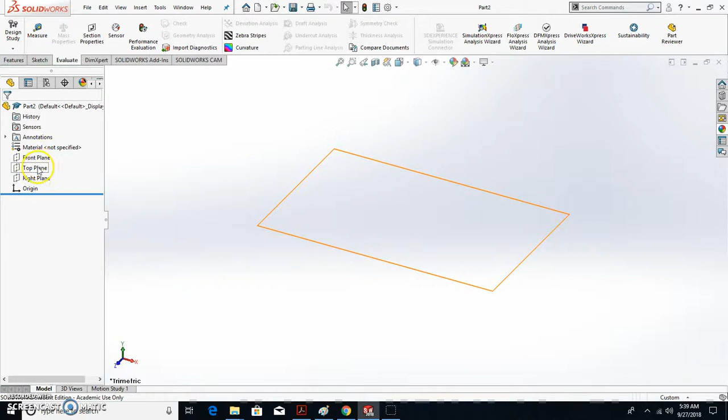Hit OK. To start that sketch, we're going to start from the top plane. So click on the top plane, click Sketch, Sketch. I'm going to start a line segment from the origin.

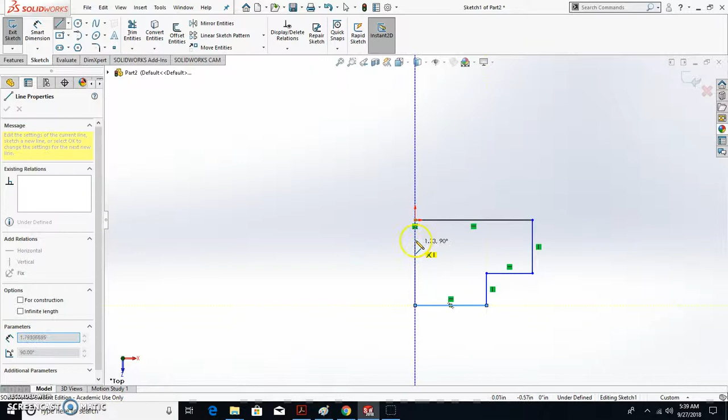Again, initially here, I don't care about the lengths of any of these lines. Let's just get the geometric shape of your dog run set. So let's say one of the requirements is it has to have an inside corner. So then I'm just going to close out the shape, and there's my basic shape of my dog run.

Then I'm going to start my first dimension here. Let's say that this dimension is 3 feet. So 3, then a foot mark, and enter. Now you should double check that this says 3 feet here.

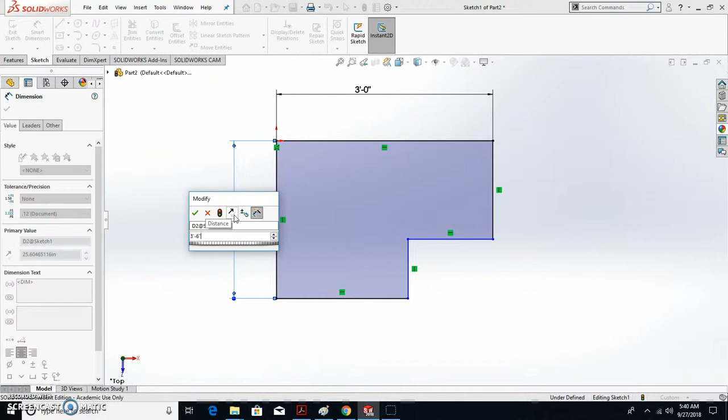Then I'm going to go here. Let's dimension this one. Let's say this is going to be 3 feet dash 6 inches. So again, make sure that you have the feet and inch marks. Accept that.

Notice what's blue yet, because these are under defined. So if I hit escape, I can drag this and drag this.

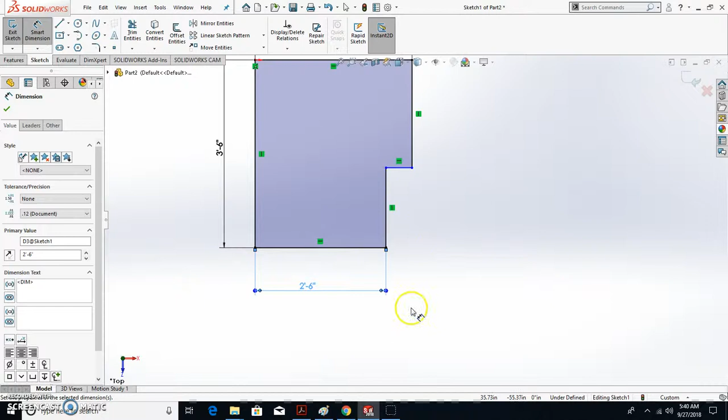Let's do this guy. I'm going to have that one at 2 feet 6 inches. Now as I look at this, that only gives me 6 inches here, that's kind of tight. I don't like that, so I'm going to go with 1 foot 6 here.

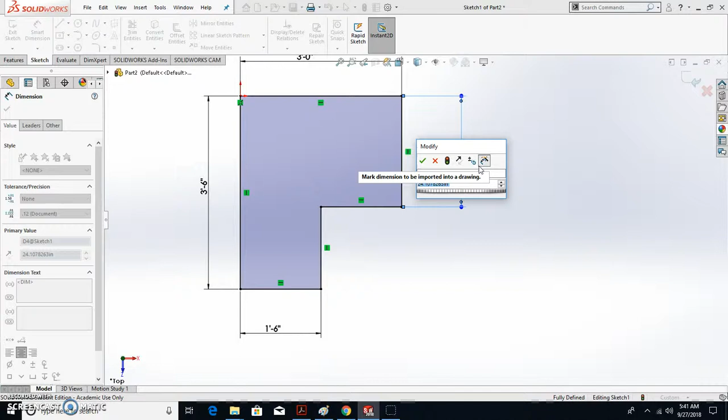And then one last dimension. I've got to do this guy. And let's see, we're going to do that one again at 1 foot 6 inches.

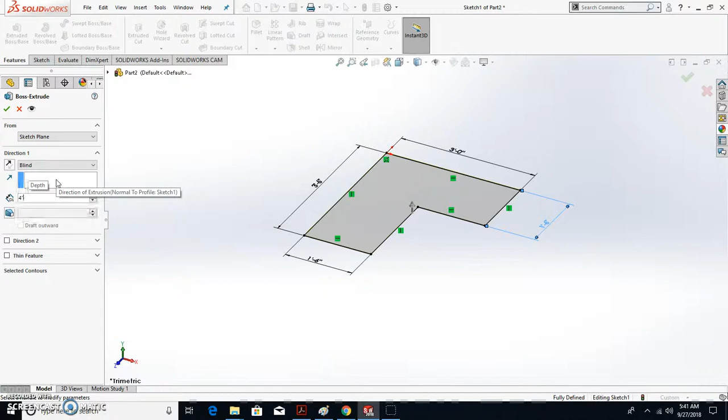Close out your, wait a minute, don't close out your sketch. We need to give it the third dimension. So go Features, Extrude. Now typically concrete pads like this are 4 to 5 inches, so I'm going to go 4 inches. Accept that, and there's our basic shape of our concrete pad and dog run.

All right, so now just go to File, make drawing from part.

Okay, from here you can use the standard A landscape, which is fine. Make sure though that this is being shown up here, and you're seeing the ANSI style title box.

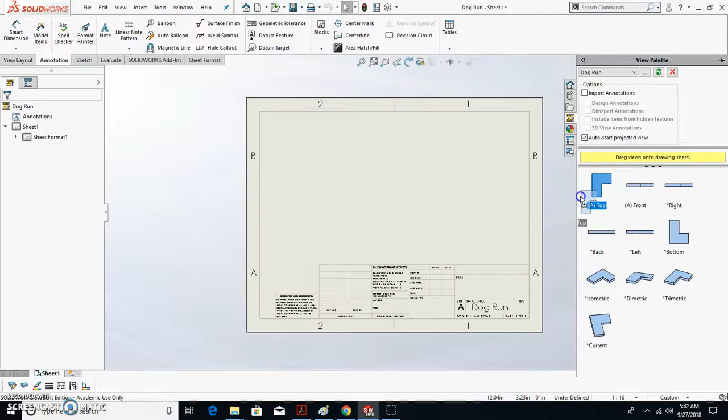So then I'm going to only require you to put 2 views out here. So you put your top view on, and then you can also, if you want, just put your isometric view. So I'm going to just drag my isometric view over here. I'm going to make this guy a little bit larger.

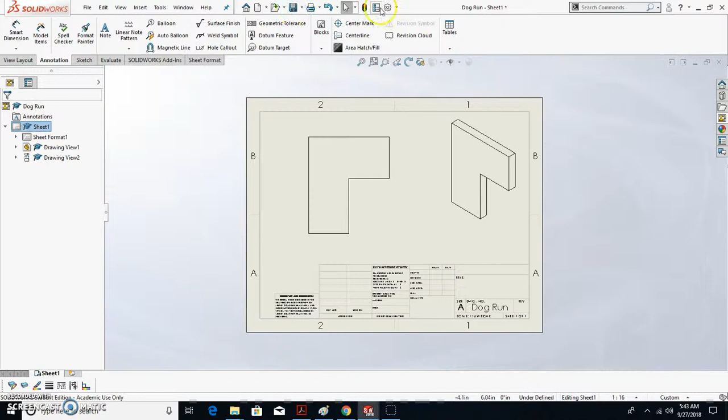112, that's probably good, 112 is fine. Okay, then again, go up to your option menu, Doc Props, make sure it says ANSI, and then your units, again, make sure it has feet and inches. And what I would do is just click on this, round to nearest fraction.

Hit OK. So then all you need to do is go to your dimensions, Smart Dimension each side of this. That's pretty much all the dimensions that you would need for this project. So it's 3/6. You don't need this one because you can get that, subtract those 2 in this.

All right, so from here, you're going to right click, edit sheet format, update your name and put the date in, or your names and the date, and then come back, right click again, edit sheet. And that should pretty much be it. And then you can go ahead and

send this. The other thing you could also do to make this more prevalent is if your line weights or line thickness aren't coming up, right click on here and make sure your line format tab is on. So again, if I want this to be a heavier line type, I can click there and put it heavier. Kind of looks nicer if it's a little bit more bold. But again, you don't have to do that.